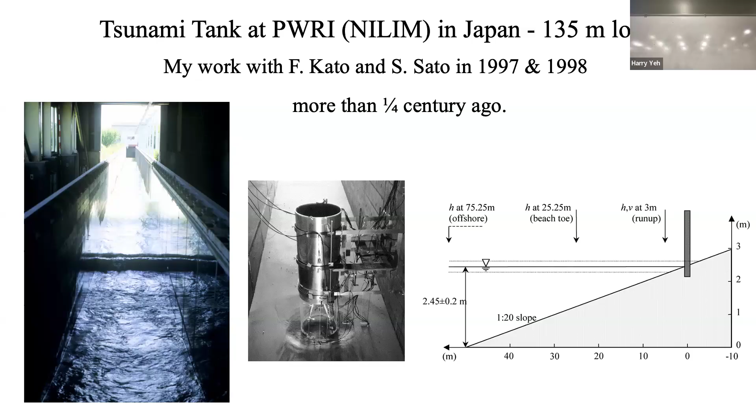That's what I did. This is a picture of how I set it up. This is the cylinder here. The wave comes from here to here, making a solitary wave that impinges on this. So what I'm going to show will be this. I'll show you some video after this. So ABC: A is the offshore side, B is the middle, C is the inshore side. This is a side view, this is a top view.

I have these funny pictures because this is a montage of two videos. This is the inside pictures, this is the offshore side, and this is the inshore side. I'll show you the video for this.

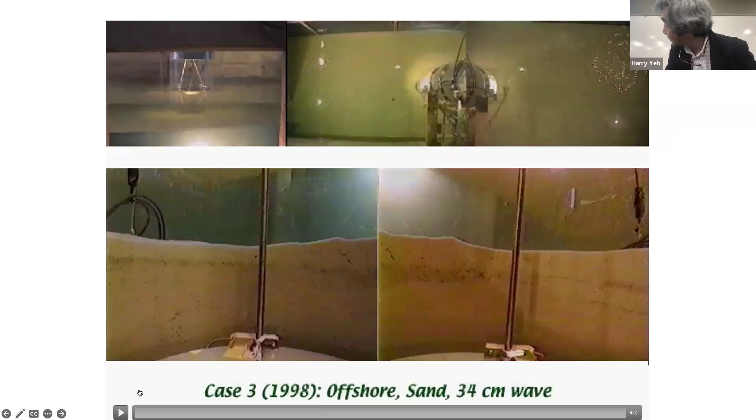Let's see, maybe I can just push this one. Oops, that was not it. So I may have to do this way. How do I do this? Let's see. Oh, here you go, I have to see this one. Here we go.

So it's a run up and drawdown. I'd like you to pay attention to this side, the inshore side of the cylinder. So it's a drawdown, meaning rapid reduction of the water surface. It looks like it's liquefied, doesn't it? You can actually see the liquefaction here. During the drawdown, the water surface drops very quickly while the pressure in the soil is still there, so that creates some instabilities.

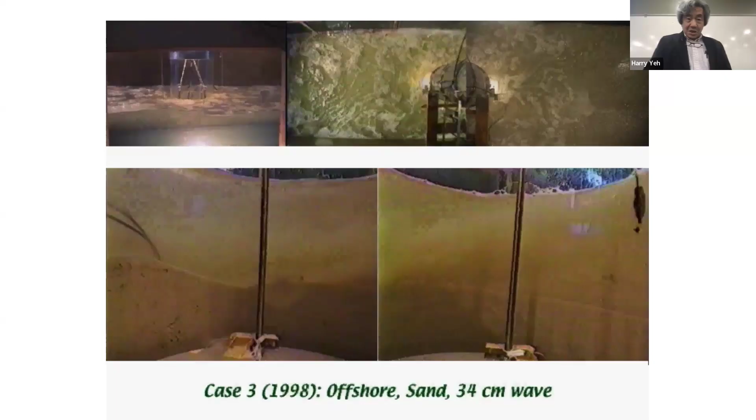Let me try to explain this. In a rapid drawdown, you're going to have a pressure like that, right? In other words, this pressure is greater than that one if you have a rapid drawdown, so you're going to get movement and liquefaction, right? So that's the mechanism. If you have a quick withdrawal, the sediment becomes unstable because pressure in the sediment is greater than the outside.

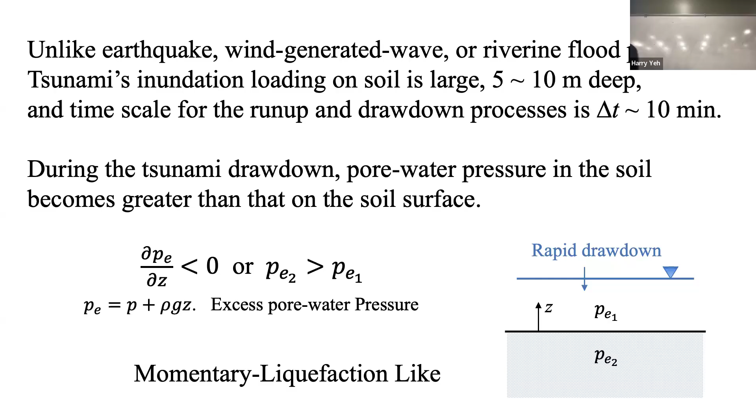So this is the way I try to explain it. Another piece of evidence is this picture, taken during the 1960 Chilean tsunami in Japan. What does it mean? The earthquake source is 17,000 kilometers away, so this place doesn't have any ground shaking. Simply, you have rapid drawdown: run up and drawdown. Run up here, drawdown here, causing failure of these quay walls. So this might be a similar mechanism.

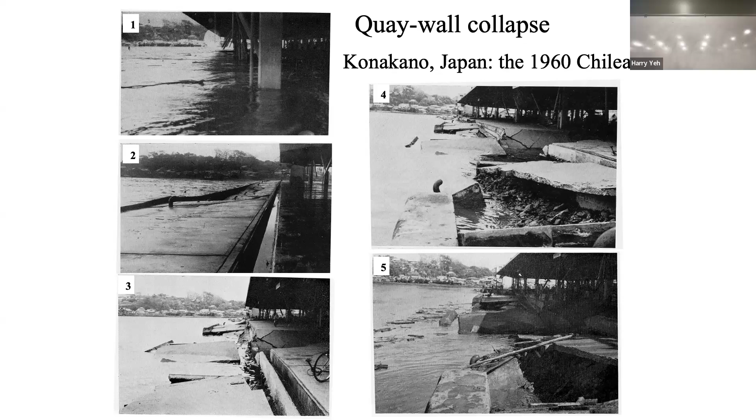The tsunami loading, let me move to the next slide. This is a simple explanation: in geotechnical engineering, if the effective stress becomes close to equal to zero, you get momentary liquefaction. Sigma is the soil stress, total vertical stress is sigma, and the pressure is this quantity. I have A_c here, that's the area for grain-to-grain contact. It's going to be very small, but not exactly zero. So that's what you have.

But what I'm going to try to do to measure the instability of the soil is use this delta. The reason is this is the one we measure in the laboratory—if the initial condition is there, I can just zero it out, so it's a convenient way to handle the data. If this quantity delta is close to this quantity, then you're going to get potential liquefaction, but if this quantity is close to this value, it's still very likely unstable.

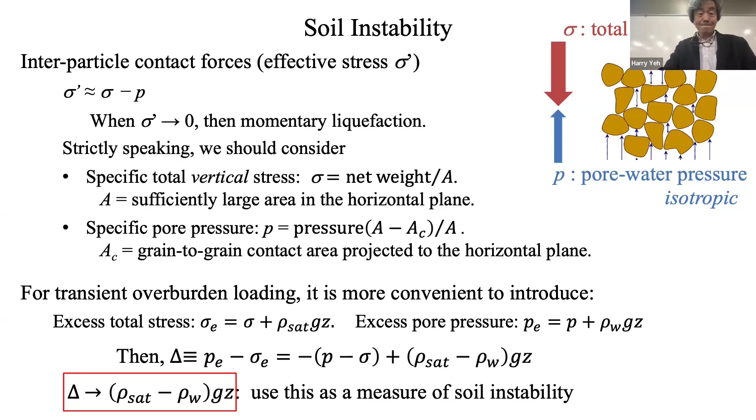I'm going to use this quantity to talk about soil instability. Another thing I did previously is this criteria for liquefaction—I have to use dpe/dz, because for fluid mechanics, pressure by itself doesn't mean much. What's important is the gradient of the pressure. You learn this: the gauge pressure and absolute pressure numbers are very different, but what matters is the difference. That's why we use this.

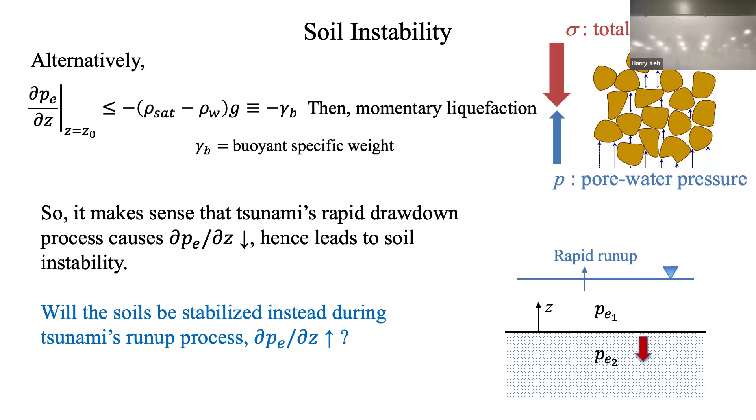So the question here is: will the soil be stabilized instead during a tsunami run-up? If you have a rapid run-up that creates a pressure gradient going upward, meaning the pressure force is acting downward, it's going to be stabilized. That's the question—is this the case?

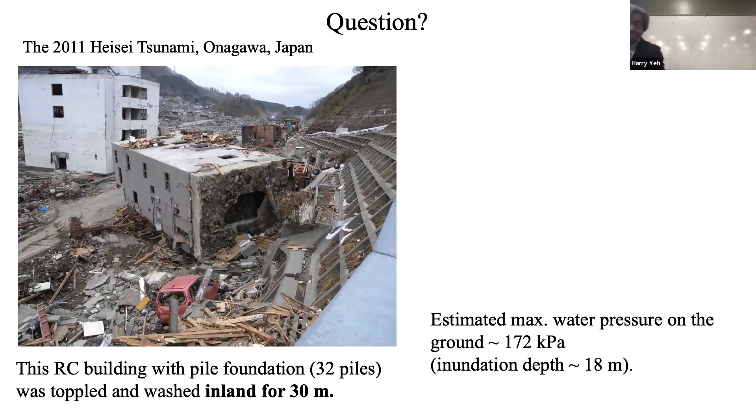So can soil be weakened during the tsunami's rapid run-up? I don't think so normally, but maybe the presence of an impermeable layer will do it, because this place was paved. So if so, to what extent?

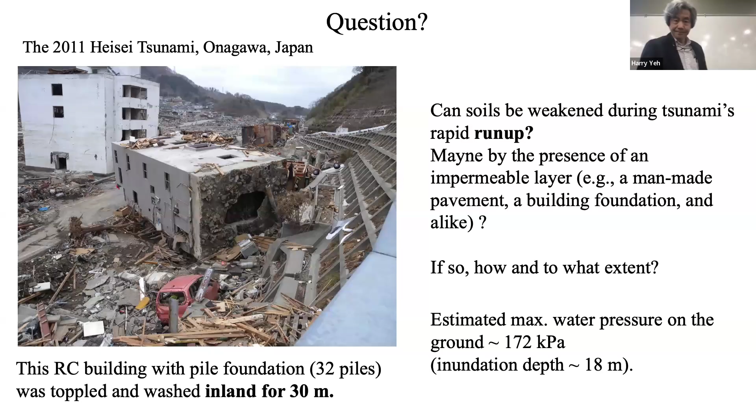So I'm going to do laboratory experiments for run-up and drawdown, trying to make a realistic scale. This is the major run-up and drawdown process in Onagawa, as I showed yesterday. If we do laboratory experiments at 1/40 hydraulic scale, the maximum run-up height will be 44 centimeters, the water pressure will be 4.3 kilopascals, and by the Froude law, the velocity will be 1 meter per second. Now, scaling that Froude law for hydraulic experiments—that's the way we try to do it.

Yeah, that would be a problem—it creates uncertainty for scale effects. If you calculate the Reynolds number, in the field it's 10 to the 7th power, but in the laboratory you get 10 to the 5th power—two orders of magnitude different. That gives huge uncertainties, and this is only the fluid flow. I'm not even talking about the condition in the soil. It's going to be a huge problem.

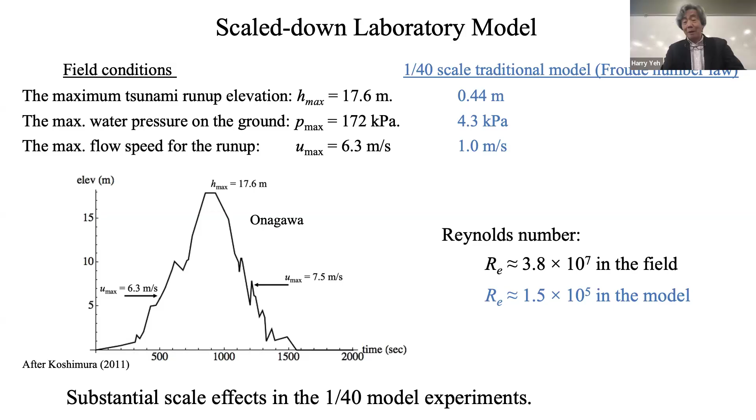So what can we do? Before that, I'm going to briefly show you scaling. For the fluid it's easy—if you know the Navier-Stokes equation, you can match it. Once you scale, these quantities reduce to order-1 coefficients: Strouhal number, Euler number, Reynolds number, and Froude number. If all those numbers are equal between field and model, you have total similitude. You have to worry about boundary conditions, but you can still do it.

In the soil, it's not easy at all. I'm just using a simple diffusion equation—I don't want anything complicated because it's too complex to work for this case. So I use Terzaghi's diffusion equation, giving a Terzaghi number, called the time factor in geotechnical engineering. K is the intrinsic permeability, this is the time scale, length scale, viscosity, this is the modulus of elasticity, and this is the porosity. This isn't even exact—there's still a lot of hand-waving because soil is so complex, but at least you can do this. If it matches, it's perfect similitude. The good part is you can manipulate these, even if the soil medium doesn't change, you can change the viscosity.

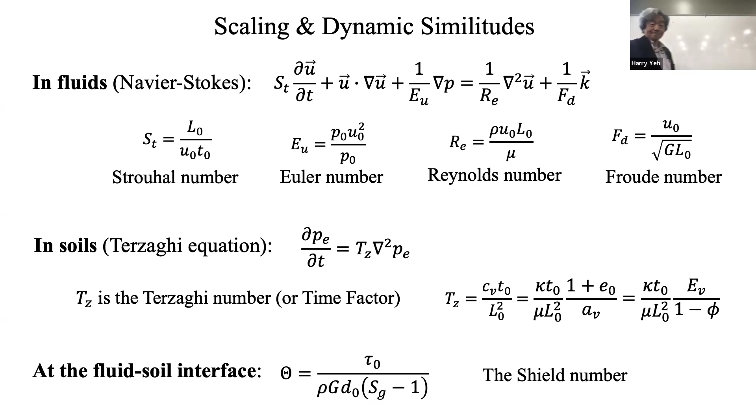Knowing this, what we try to do is use a centrifuge. A centrifuge lets you adjust and control the body force. I can change the gravitational force - it's not that, using centripetal force becomes body force.

So body force is controlled by that centrifugal force. That's nice. If you use a 1 to 40 model, you can use 40G kind of stuff, right? And then for this, a relatively small scale model can mimic the large scale phenomena.

That's what we can do. And you can adjust the Terzaghi number because the model is small enough. If the model is not small enough, then I can use viscous fluid. If the model is large, it's not easy to do.

For this case, you can adjust the Froude number law, but still I have a problem with the Reynolds number. You're gonna get a mismatch in the Reynolds number, but it's gonna be better if you adjust the gravitation. It's better, but still you have scale effects based upon the Reynolds number.

But also, you know that if the Reynolds number is large enough, then probably inertial force dominates compared to viscous force. So if it's large enough, we can hope it doesn't matter much. That's our hope, okay? That's what we try to do.

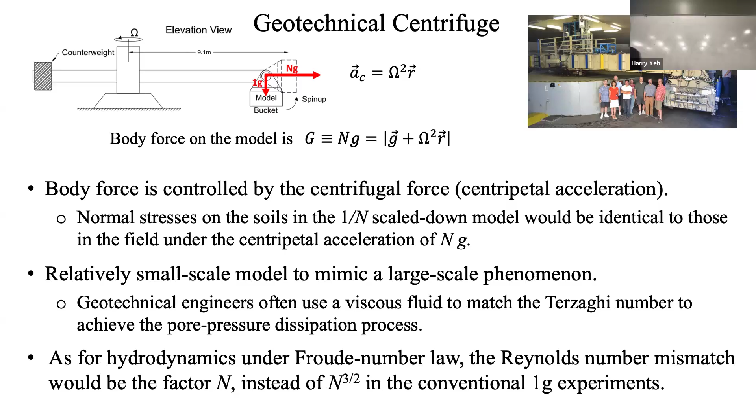So for this case, if I use a 1 to 40 scale, this is a traditional centrifuge model. You're gonna get exactly the same pressure, and the velocity is exactly the same as the prototype. You can do this. Yet, as I said, you have some problem about the Reynolds number, so it's better.

But for the hypergravity experiments, it becomes better. It is kind of neat, right? You can control the body force to do some experiments. But there's some kind of drawback too - it's not easy to do.

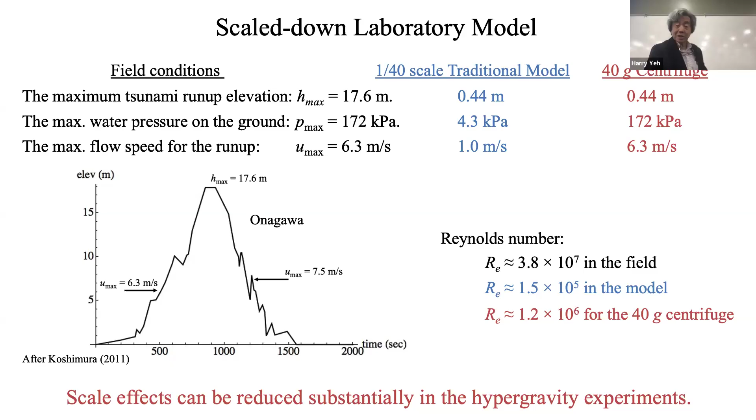That's one thing. And what we did here is this: we used the UC Davis centrifuge. I think it's about an arm length of 9 meters - very long. And the bucket is about 80 centimeters.

So this is the stuff. We put it in this bucket in here, and if you turn it, it will be like this. And then this box, the specimen box, is put inside in this. And then these are the people we did this together with - this is a PhD thesis by Maggie Exton.

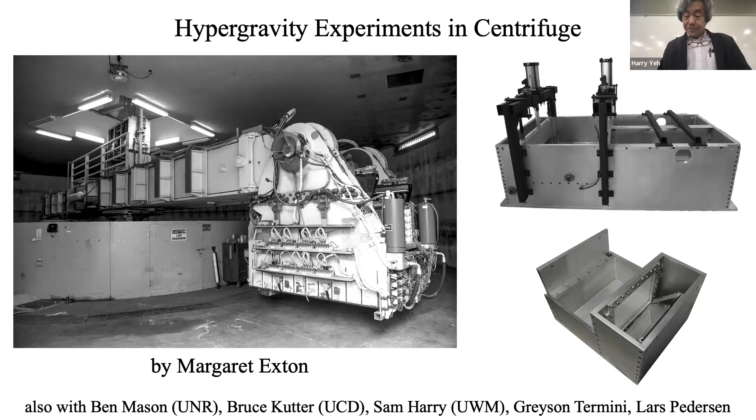Right? And for this, a 1/40 model - make it very small, right? But in the prototype, it's very, very large. I think it's equivalent to 20 meters for this case. But anyway, so we have to be very careful about small scale experiments.

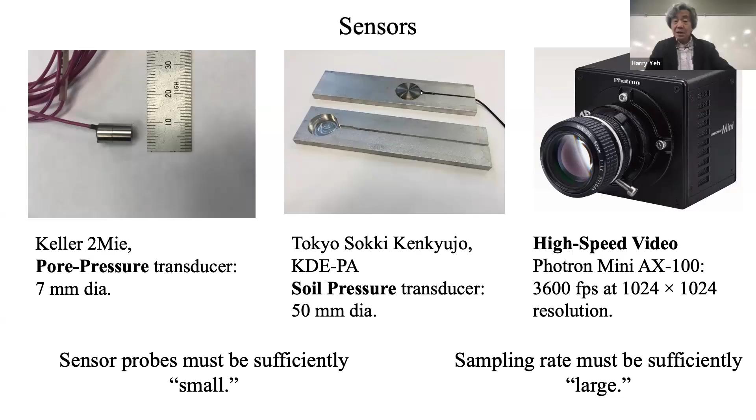And then what we did here is, oops, oh, this is okay. For the run-up case for this, I put the pore pressure transducers in here. This is the soil pressure gauge. And I put the impermeable layer in here. That's the things I'd like to try to find out what is going on. So you're gonna get the soil pressure gauge in here, soil pressure transducer in here. This is the pore water pressures.

And I use the soil 40 times viscous fluids, so try to match the Terzaghi number. And it may or may not, but we just try, right? I'm not claiming that I can make the exact similarity in the soil. And especially if I'm using the fine sand, if you make it the prototype scale, sand becomes coarse. That's the way it is. All right, I guess that's it for that. So you're talking about 50 centimeter long. If it's 40 times, it's 20 meter in prototype.

Right? Okay. So I hope I can show you some, where the heck is this? Some pictures for under 40G. This speed is really 10 meters per second. And this picture is taken in 0.07 seconds. And it looks like this is real, right? Yeah. So this is the flow condition I generated in the centrifuge.

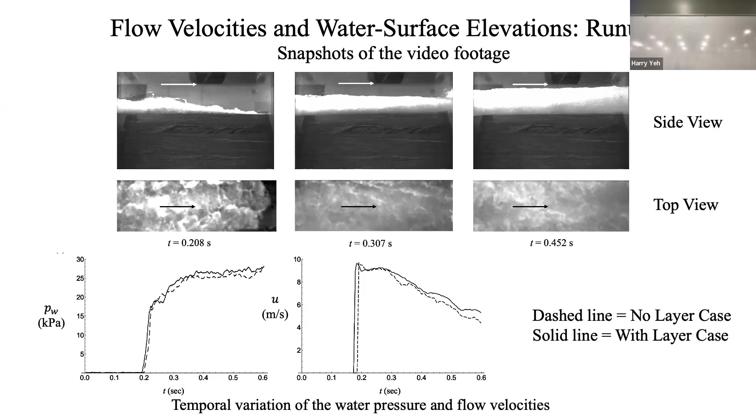All right. And then in the run-up case, there's 2 stages for the run-up. Initially you have this kind of condition coming from here to here, run-up. Okay, and then feeding in the water behind this, eventually it's gonna be highest value here. So it's gonna be backflow, actually not the backflow. The wave itself is gonna go backward. So this is the gradual secondary inundation from the backup flows. Okay, this is still run-up phase. For the run-up phase, it's a leading front and the backup flows. You're gonna get completely inundated for this.

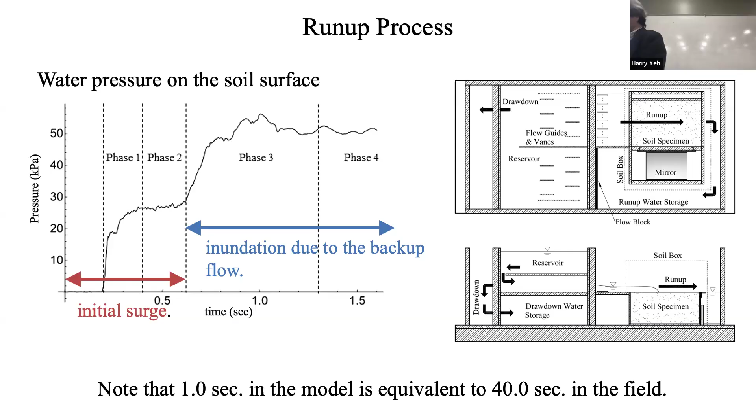So for that, yeah. 1 second means about 40 seconds in the field. So this is the condition here at the pore water pressure gauge. And if this quantity, delta, is 83.4 kilopascals, it's totally liquefied. More or less it's liquefied, right? Liquefaction. So this is the raw data, and this is the water surface. And there's two lines, which is pore water pressure, and also excess total stress here. So for this case, total stress and pore water pressure is constant. So delta is essentially equal to zero. Nothing happened for this case.

This is the pressure at the bottom. I just want to repeat this one. Try to find the pressure at this bottom. This is the run-up phase. So this dotted line is the water surface. There's two lines in here. One of those is pore water pressure, the other one is total stress, total soil stress. It does not change any of the stuff for the run-up.

Okay, so if you have the impermeable layer, it does not change. Still same thing. Let me see it again. This is water surface. Those two lines represent the pore water pressure and the total soil pressure. So this quantity is equal to zero. That means there is no change. That does not show instability. Okay? Because you have to go up to 80 some kilopascals to make total liquefaction. So those two are sort of boring.

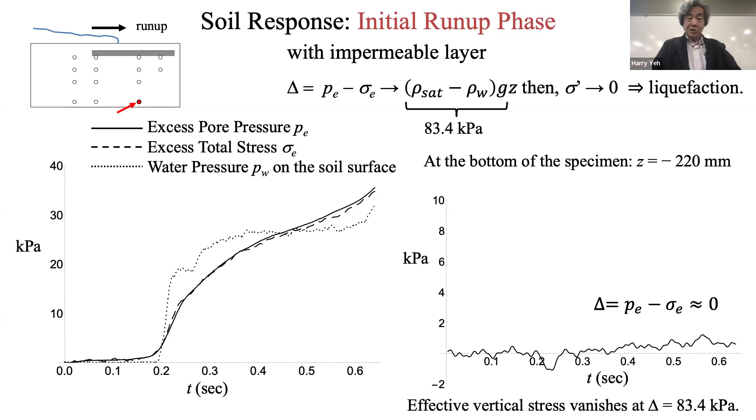So this is not boring here. It's underneath the impermeable layer, right here. So in this case, the critical number is 13.7 kilopascals, because the elevation is higher. So take a look at this. Pore water pressure is increasing faster than the total stress. Okay? So you're going to get the delta values like this. This is 9.15 kilopascals maximum. The critical number is 13.7, so it did not liquefy, but it's weakened underneath for this case. Okay.

You understand this? Right underneath of this, you're gonna get the sudden downward stress that creates like this. But I will explain to you why this is so soon. This is more like a blast-related instability created in the soil, I think. You know, sudden loading, impulsive loading for this. And then we can try to find that later on.

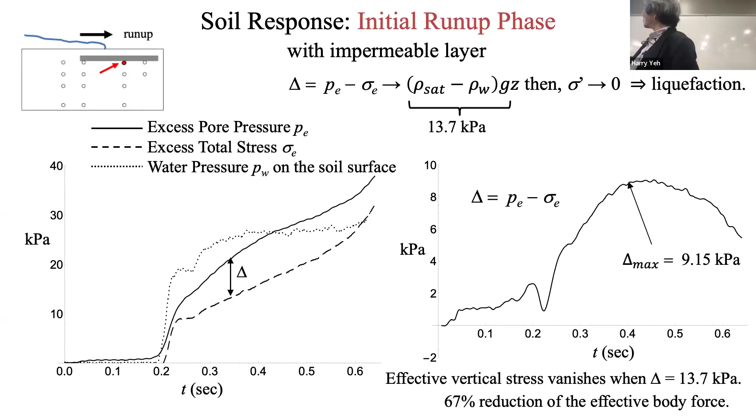So you're gonna get, I wrote it down, this impulsive loading, but it's recovered quickly. Actually, I think I showed you this one, the recovering very quickly part. This is the part I'm talking about, recovering very quickly. So that's what the quickly means. Take a look at this. This is 0 to 0.6 seconds. Right?

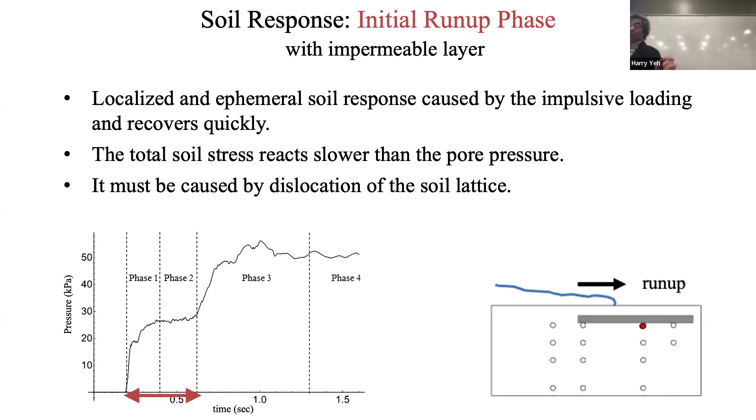And then we also talk about the soil stress reacting slower than the pore pressure. It must be caused by dislocation of the soil lattice. Some people call this the fabric, right? So this is interesting. And then we're going to talk about the second part of the run-up. You're gonna get a much larger loading, but much prolonged loading. You understand that this is still the run-up process, but this is created by backup flow. Right?

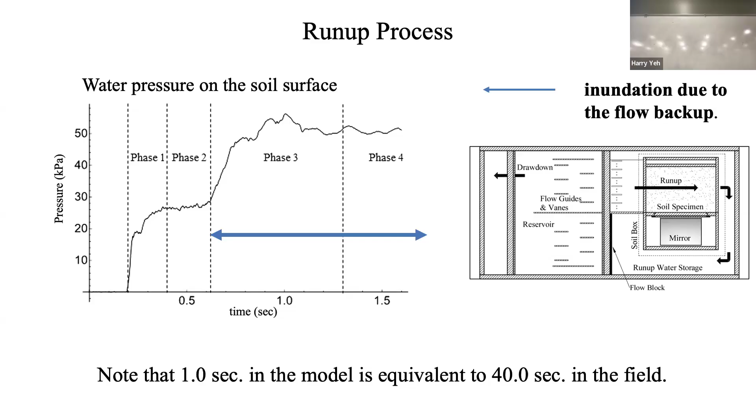So for this, that's what you just saw earlier in this portion only. That's what I showed to you earlier. We just wanted to make sure what I'm talking about here. This picture is right here. Right? Later on you have some data in here. I just plot the data. For this case, the maximum I get is 8.12 kilopascals.

And then again, you have another difference between pore water pressure and the soil stress. And this is reduced rather gradually on the side of the impermeable layer. Behavior is different. Right? And again, it's not reaching the 13.7 kilopascals. So it's not totally liquefied. Maybe I should say that for this criterion, it's not liquefied. You do not know, but it's very close.

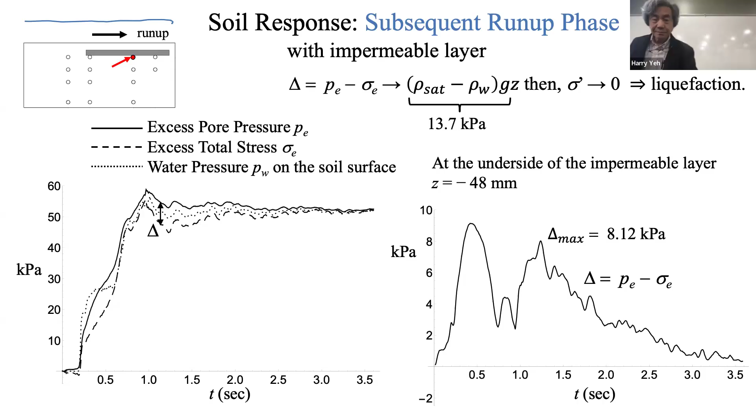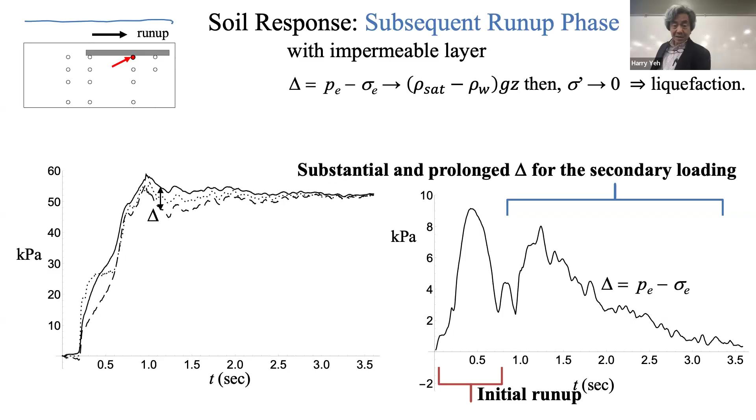Let's see. So I'm talking about the substantial prolonged Delta for the secondary loading, this initial run-up, and the secondary loadings here. Okay? And then on the bottom part, right here, you still have something going on. The initial part at the bottom, there's almost none. Right? But the secondary part here is penetrating all the way to the bottom. This discrepancy is affected even in the bottom portions. So what is going on?

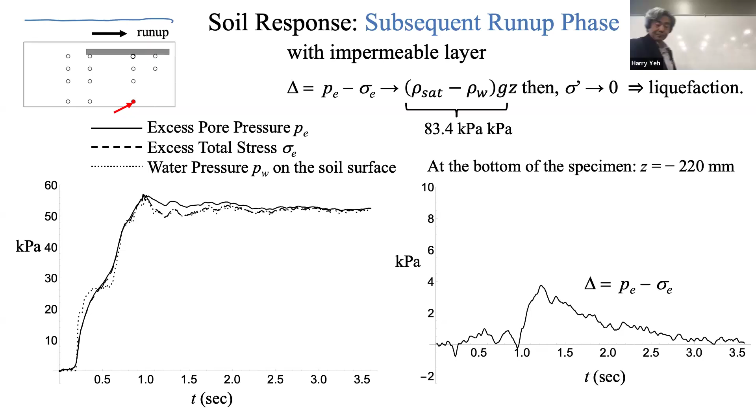So the first part here is, I think, likely the blast loading, a sort of instantaneous instability happening in the soil, but this part is much more prolonged. So it's a substantial prolonged Delta value. And I think this is created by something called overpressure. But let me just talk about this one. During the impulsive increase, you're going to get a temporal localized spike in the Delta. So this is the same blast-induced soil instability. That's my interpretation. A similar one is happening later on also, but this is much more prolonged.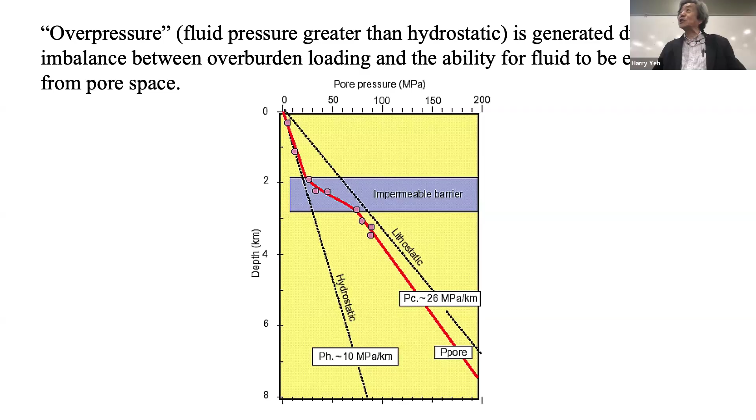So it's very hard to expel the fluids from the pore space. That's conjecture. I should say this is my own explanation. It may or may not be right, but that's the way I have it. So those are the run-up process. Okay, let's try to do the drawdown process. Here it is.

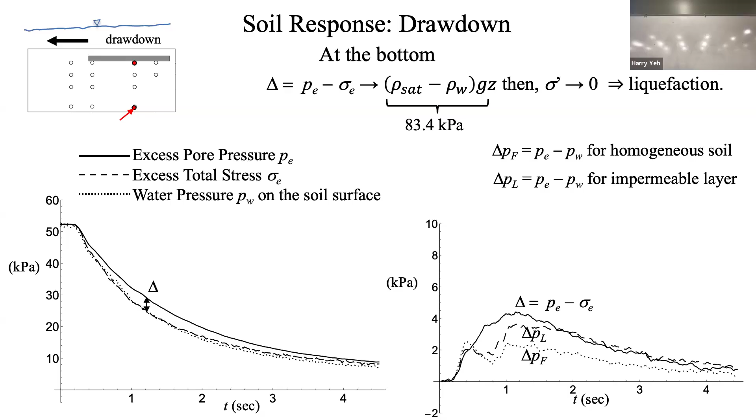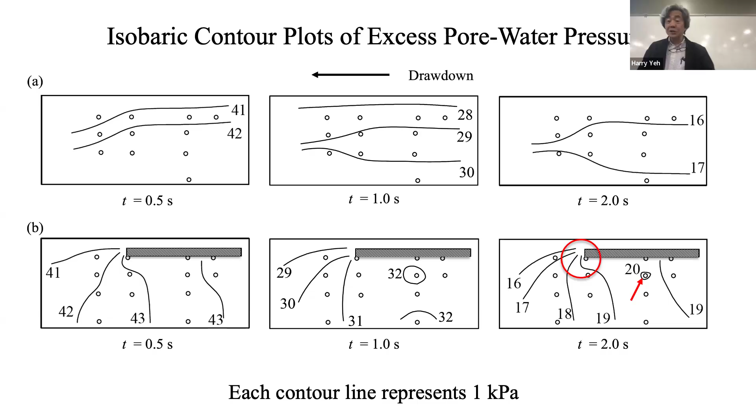And then, as I said, at the edge of that, this is quite important here, isn't it? You know, a very strong pressure gradient. So in this portion, the soil becomes very unstable. Actually, that makes sense from the field observations.

So this is a summary. We explored the mechanics of the soil response to tsunami-like rapid loading using this centrifuge. And that gives you a realistic tsunami inundation process. Inundation height is 5 meters. This is 10 meters here. Oh, by the way, this place is about 19 meters. It's quite a bit different.

So this can be sort of explained if there's an impermeable layer. Underneath it is unstable. And this can give you an explanation of why this building failed during the run-up. Without it, I'd say that during the run-up, the soil is supposed to be stabilized. But that is not the case if you have an impermeable layer.

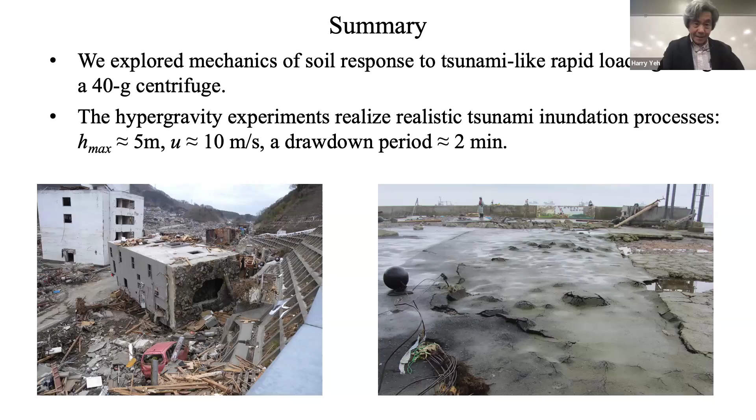Right? So, for the summary, in the run-up phase, a sudden pressure rise creates the dislocation of soil grains. So this is blast-like instability, the very first part. And the secondary part shows that the slower flooding still also creates instability. And I call this overpressure, or disequilibrium compaction, which some geologists talk about for much larger scale phenomena. So that's my explanation for the run-up.

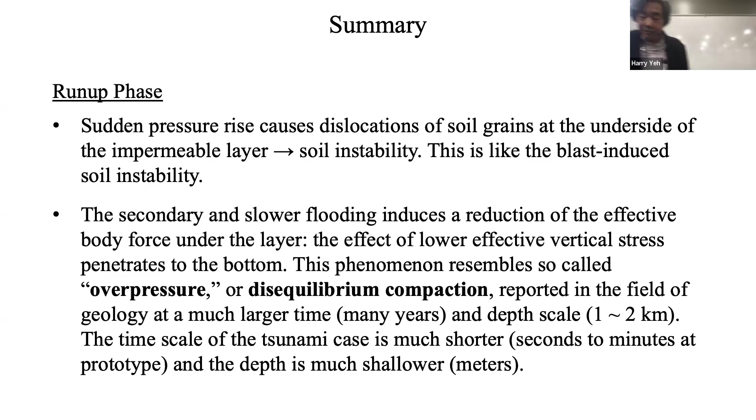For the drawdown phase, the pore water pressure developed causes instability. This was reported earlier, but indeed if you have a drawdown, the pressure gradient becomes downward. That means the pressure force becomes upward. But this experiment is the one which really presents actual field-like scale measurements for this. And then instability is created if you have the presence of the impermeable layer.

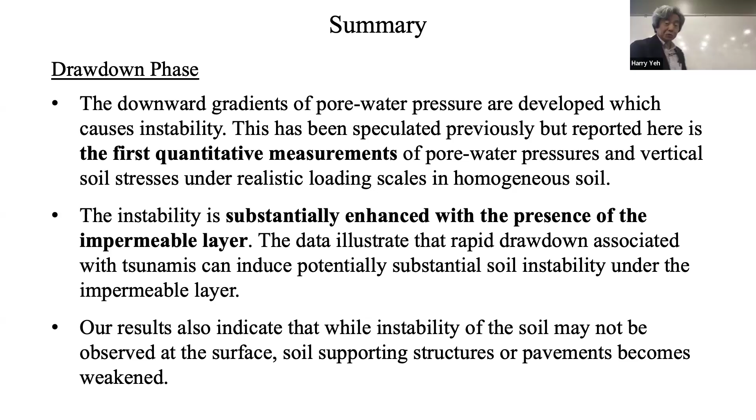So I think the supporting structure for the basement and the pavement becomes important for the soil response. And this is the results. I think this is it. This is my last slide.

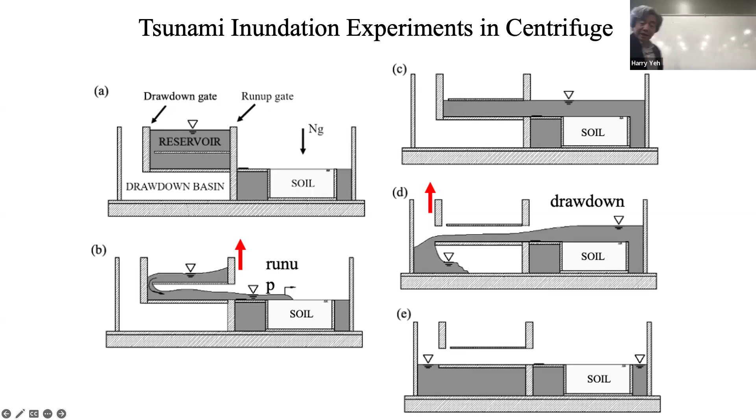And the side boundary, I don't think it's my concern because it's very fast. And the boundary layer on the side boundary can be very thin. For this case, boundary layer thickness squared is nu t.

Oh, by the way, I have to say that in order to make a nice similitude, I use viscous fluid in the soil. But if I use viscous fluid for this surface flow, then the Reynolds number becomes worse. So I use regular water for these portions, and only the fluid in the soil, I use the viscous fluid.

How much did you increase the viscosity? 40. 40 times.

More questions for Dr. Yeh? You get totally lost. But this is a nice toy, isn't it? Yeah.

Next, I'm gonna try to operate this condition manually. So send the graduate student to the centrifuge at 40G to see how they perform. So he did two experiments back to back. How much uncertainty? You're not gonna get exactly the same result, there's gonna be variation. Hold on. The variation is, okay, I can tell you the source of error.

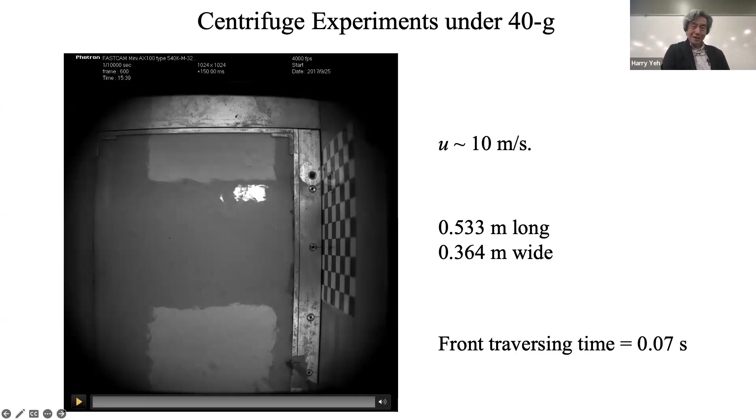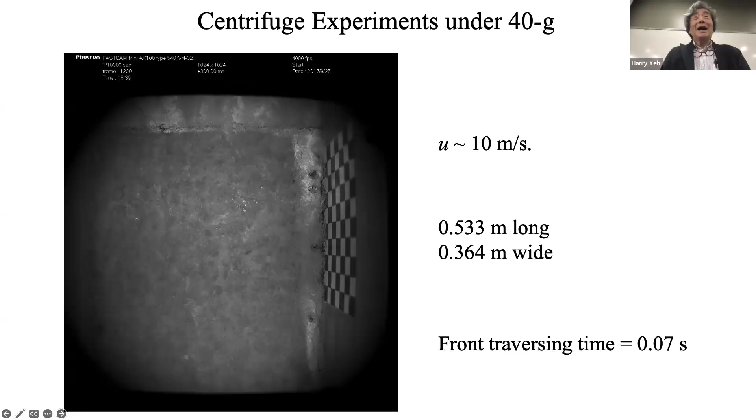Thank you all for coming. Yes, this is super cool. I want one of these cameras. I gave the cameras to Chris Higgins. Oh, I need to call Chris and ask for the camera. What is he using the cameras for? Is he using them on bridges? I don't know, because I'm not going to use it anymore. I shouldn't say that, people are listening.

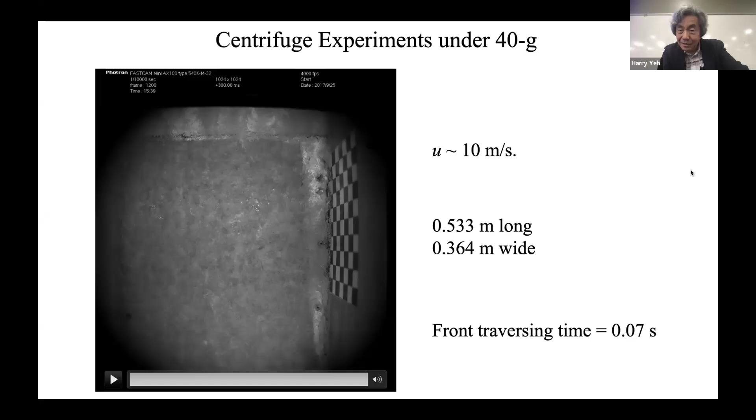Oh, somebody is asking questions. Too bad, I'm sorry. Stop share. There are 3 questions. Angelica, can you unmute? I cannot hear you. I provided permissions for her to speak. Well, I think everybody's gone. Angelica is there?